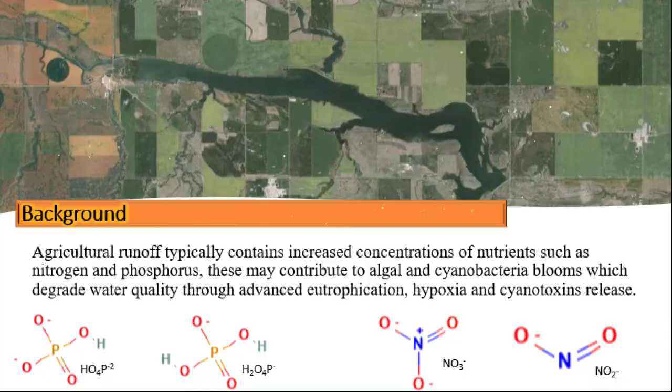A watershed that has been negatively affected by nutrient contributions includes the Gulf of Mexico Dead Zone, which is an area of hypoxic waters at the mouth of the Mississippi River. Its area varies in size, but it can cover up to 6,000 to 7,000 square miles. It occurs between the inner and mid-continental shelf in the northern Gulf of Mexico, beginning at the Mississippi River Delta and extending westward into the upper Texas coast.

It's the largest dead zone ever recorded, and I know you're all asking, how does this relate to me? I'm a farmer, or I live in the city in southern Alberta. Why is this relevant? Oh, please stay tuned.

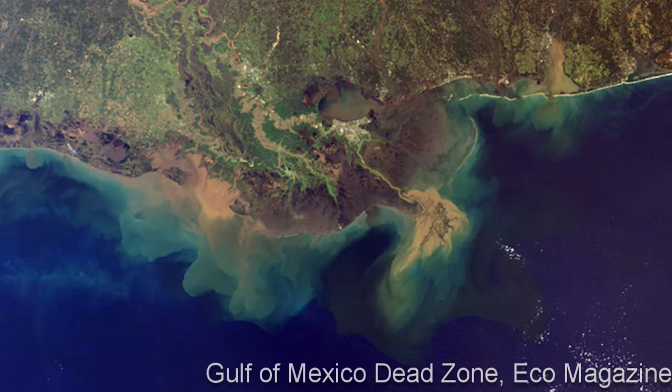Getting closer to Canada, Lake Erie is another example of a watershed that has been negatively affected by nutrient contributions. In Lake Erie, in 2014, toxic algal blooms resulted in fouled water that hundreds of thousands of people rely on for drinking, cooking, and bathing, forcing hundreds of thousands of people to rely on bottled water.

Blue-green algae, or cyanobacteria, choke up huge portions of the lake and have re-emerged as an annual summertime problem after nearly disappearing for more than a decade. And although the size of the bloom varies from year to year, in 2014, the bloom was nothing compared to the 2011 record breaker that took over a whopping 5,000 square kilometers of the lake. There is clearly a trend towards larger blooms.

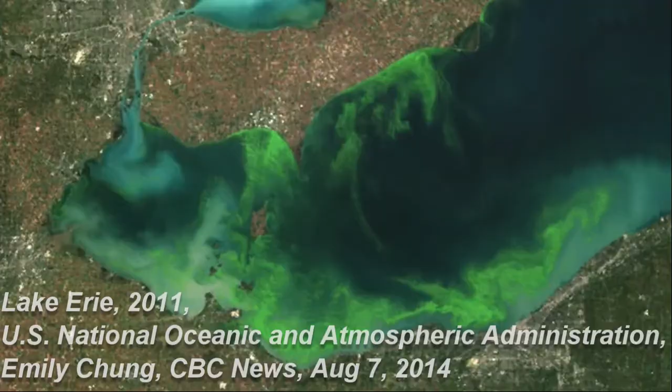And I know what you're thinking. Sure, that's in Canada, but that's a long ways from my farm or community in southern Alberta. How is that relevant to me?

And this is but one example of many within Alberta, as many of the reservoirs in southern Alberta are eutrophic systems. These are rich in dissolved nutrients that stimulate the growth of aquatic plant life. And decomposition of that plant life results in the depletion of dissolved oxygen, resulting in hypoxia. Some of the reservoirs can at warmer times of the year experience blooms of blue-green algae, also known as cyanobacteria.

The cyanobacteria is a naturally occurring bacterium that is found within many water bodies throughout the world. During periods of increased temperatures, large populations can develop, which release a toxin, a cyanotoxin, microcystin, that can result in death by respiratory system failure or liver cirrhosis and failure. While this bloom dissipated days later, it is important that if you notice blooms of this bacteria within water bodies and water sources such as springs and water troughs, that you prevent animals and livestock from entering or consuming the water and clean out that water source.

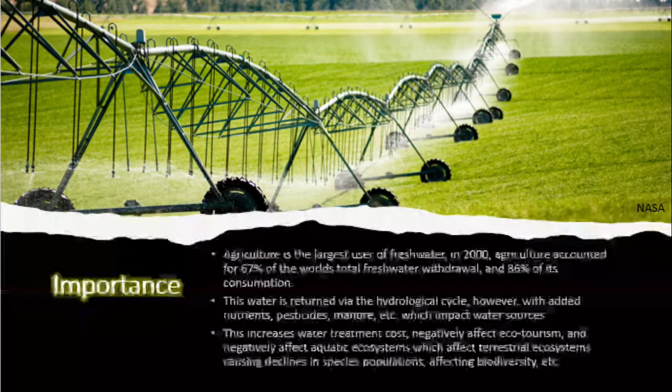It comes as no surprise that agriculture depends on fresh water. It's the largest use of fresh water in the world. In 2000, agriculture accounted for 67% of the world's total freshwater withdrawal and 86% of its consumption.

This water is of course returned via the hydrological cycle, however, with added nutrients, pesticides, manure, and other pollutants, which impact water sources. This increases water treatment cost, negatively affects ecotourism and negatively affects the aquatic ecosystems, which affect terrestrial ecosystems as well, resulting in declines in species populations, affecting biodiversity, and many other effects.

There's many different beneficial management practices that can be implemented to control nutrient contributions to downstream watersheds. These include conservation tillage, crop nutrient management, pest management, conservation buffers, irrigation management, grazing management, animal feeding operations management, and erosion and sediment controls.

I know what you're thinking. I'm just a farmer or a rancher, or I own a golf course in Alberta. I don't have a lot of money to invest in new technology. And why should I spend a bunch of money to solve problems thousands of kilometers away from me? What can I do on a farm level to mitigate problems closer to me?

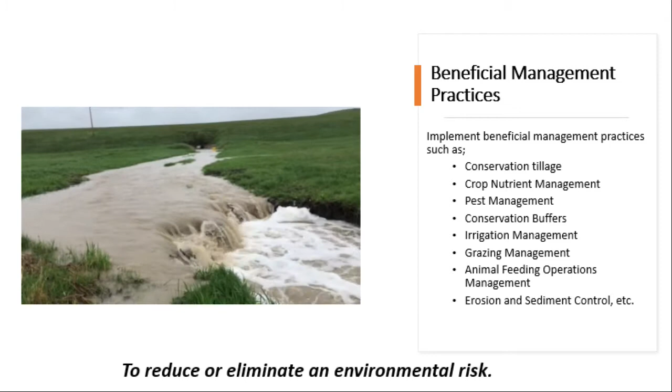Throughout this presentation today, I'll be discussing the phosphorus filter, which fits loosely into the animal feeding operations management and erosion and sediment control areas. Phosphorus is an essential nutrient for plant and animal growth because it's a key element in many physiological and biochemical processes. Alberta soils are generally low in phosphorus for optimum crop production, less than 60 parts per million crop available phosphorus in the top 15 centimeters of that soil profile.

Successful crop production often requires the addition of phosphorus in the form of chemical fertilizer or manure to the soil. Phosphorus is also added to livestock diets to ensure optimal growth, and much of that ingested phosphorus is excreted in the urine and feces. As part of the natural and essential nutrient cycling, phosphorus adheres tightly to the soil profile, so it is commonly transported by erosion from the landscape. Runoff from agricultural systems and from land development, pollution from septic systems and sewers, manure and sewage sludge spreading, as well as other human-related activities may increase the movement of phosphorus containing inorganic and organic substances into aquatic systems.

Phosphorus occurs in many chemical forms in soil and water. However, it is generally not very mobile in the soil, unlike some nutrients such as nitrogen. Also, phosphorus does not have a gaseous form that cycles through the atmosphere, like other essential nutrients. Phosphorus is readily absorbed by soil particles and generally does not leach through the soil profile unless soil phosphorus levels are excessive, and then it can migrate downward with water movement. Generally, overapplied phosphorus tends to accumulate and stay near the soil surface, and this can increase the risk of phosphorus loss through soil erosion and surface runoff.

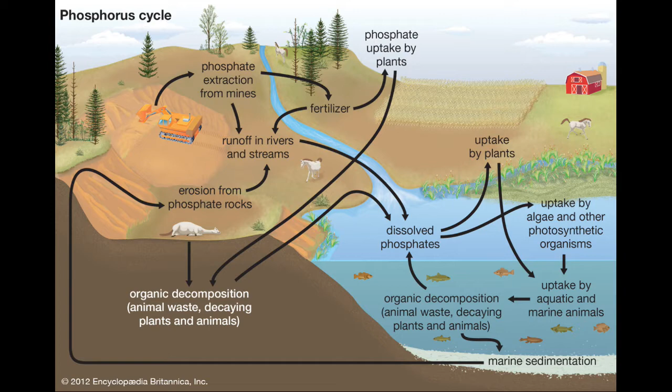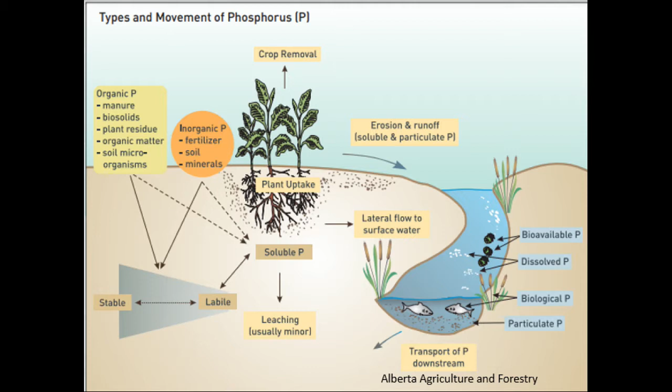In soil, not all phosphorus is the same. It can be either organic or inorganic molecules. In addition, the molecules that contain phosphorus will change in the soil through nutrient cycling. Phosphorus inputs into the soil for agricultural purposes are primarily from the application of chemical fertilizer and organic sources, such as manure. Soil phosphorus is categorized into three types: soluble phosphorus, labile phosphorus, and stable phosphorus. Throughout the presentation today, I'll be discussing the soluble phosphorus phase. Soluble phosphorus is a very small part of the total soil phosphorus, but it's the fraction taken up by plants. It can enter surface water bodies, is biologically available, and can rapidly stimulate aquatic growth.

Phosphorus moves from the landscape attached to soil particles carried by wind or water, and in dissolved forms carried by surface water runoff. Particulate phosphorus refers to all forms of phosphorus absorbed by soil particles and organic matter. Dissolved phosphorus, or DP, refers to the form of phosphorus dissolved in the surface runoff. Once mobile, phosphorus can be redeposited elsewhere on the landscape or be carried to surface water, potentially degrading water quality.

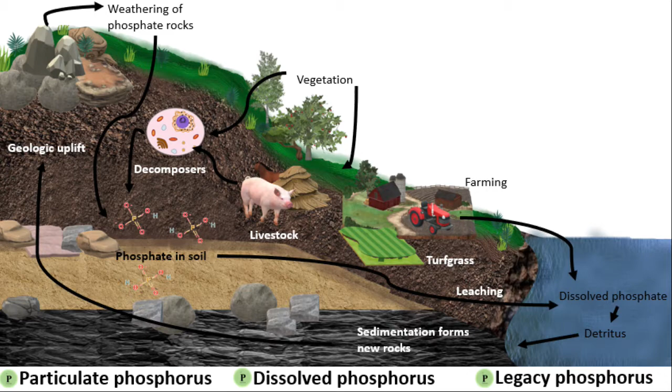Surface water runoff can transport nutrients such as phosphorus and nitrogen from livestock manure and fertilized agricultural fields into freshwater bodies. Oklahoma State University researchers have been developing phosphorus filters to effectively remove dissolved phosphorus from surface water runoff. In Alberta, most of the phosphorus is in the dissolved form, which is readily available to algae and aquatic plants, which can result in algal blooms and excessive plant growth, which both cause deterioration of water quality.

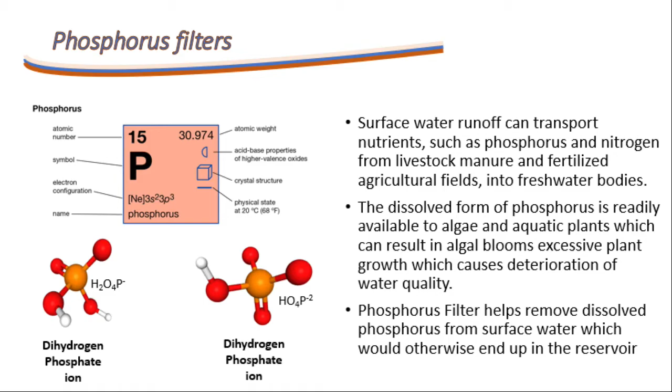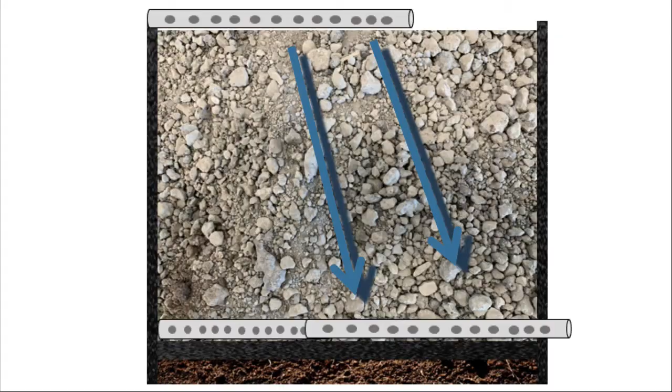The phosphorus filters are designed to use industrial byproducts such as fly ash, steel slag, red shale, and other materials such as biomass. These can be used as a filter media to capture and hold the dissolved phosphorus, thus preventing it from moving into the water body. Within the filter structure, the runoff wastewater is introduced to the filter media through perforated PVC pipes. The water flows down through the media, and the PSM binds the dissolved phosphorus, thus reducing the concentration in the water. The water flows out of the perforated PVC pipe and out of the filter system. It is important to have the filter system drain into an area that is resistant to soil erosion, such as a vegetated buffer.

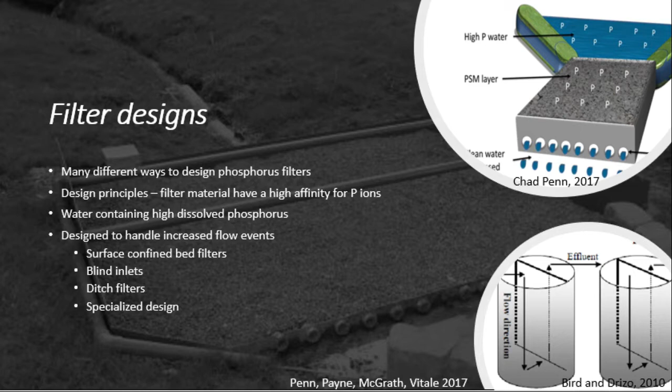There are many different filter structures that are generally specialized to meet the project objectives and site conditions. The filters are built to match the filter media that is used. And the filter must also be constructed to meet the runoff velocity and volumes for an increased precipitation event.

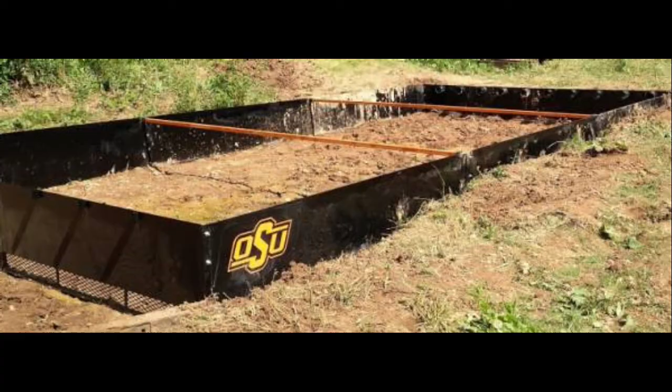Some of the possible filter structures include surface confined bed filters, blind inlets, ditch filters, and specialized designs such as tile drainage filter boxes, submerged cages, and membranous filter systems.

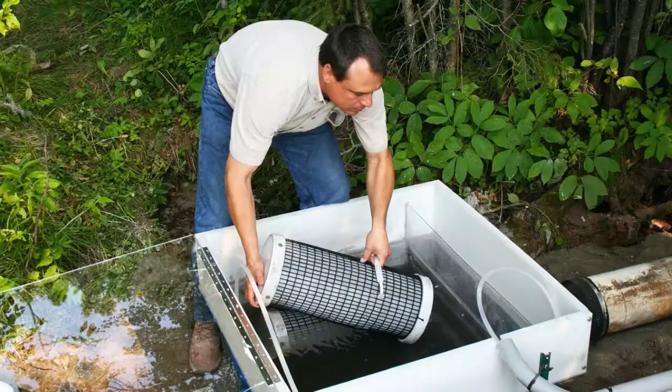In 2017, Alberta Agriculture and Forestry staff, in partnership with the County of Warner, are verifying the effectiveness of the phosphorus filter technology in Alberta through the installation of a phosphorus filter in a known nutrient-rich runoff environment. The primary purpose of this is to determine if the phosphorus filter is effective under Alberta's environmental conditions.

This site will become a demonstration site for producers and producer groups in the future to determine if the phosphorus filter technology is a cost-effective management option that can mitigate phosphorus loss and be a beneficial management practice option for landscape and production systems in Alberta.

Water sampling to date indicates phosphorus removal is approximately 95%, and the phosphorus filter is still being monitored for its filter effectiveness. It's the first filter in Canada. It's located on Tributary 4, just north of Highway 506, and it is a $70,000 project.

Project partners include the County of Warner, the OK Colony, Oklahoma State University, and of course, as mentioned, Alberta Agriculture, Environmental Stewardship Division, and Irrigation and Farm Water Division.

This project includes evaluating the effectiveness of phosphorus filter technology in Alberta and includes testing it out on a large watershed and water volumes. The purpose of this is to determine if filter material will freeze and perform in freeze-thaw effects. Water samples have continued to be taken. However, the project has since been decommissioned.

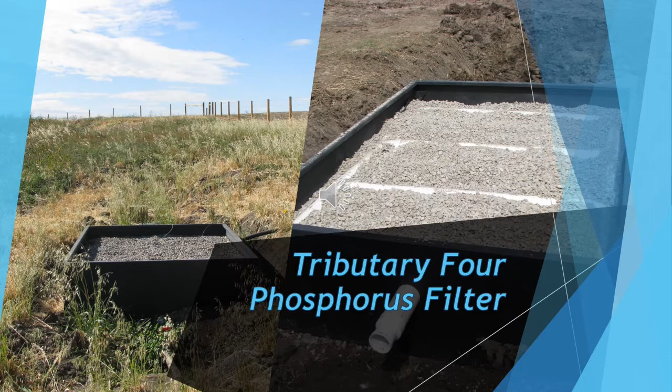This is the Tributary 4 phosphorus filter after it was installed. As you can see within the filter structure, there is a gray material. This is a gravel layer that is overlying the biomass filter material shown earlier in the presentation. The biomass material is a more expensive filter material made in Southern California. As mentioned, there's many other filter materials that can be used, such as fly ash, steel slag, and red shale.

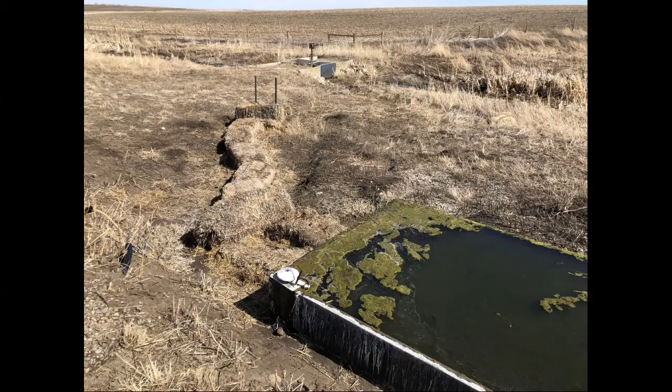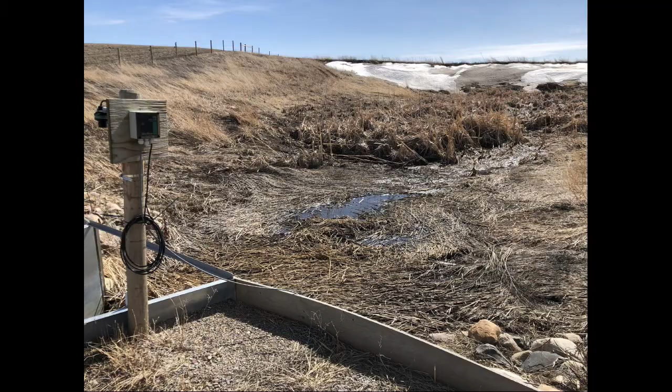The instrumentation shed, as shown, includes a weather station and ISCO water samplers that were used to collect water samples from the filter structure. The flume was used to measure the water flow from the reservoir, and the project area was fenced, and an off-site watering station was installed to provide water to livestock that are fenced in the parcel following harvest.

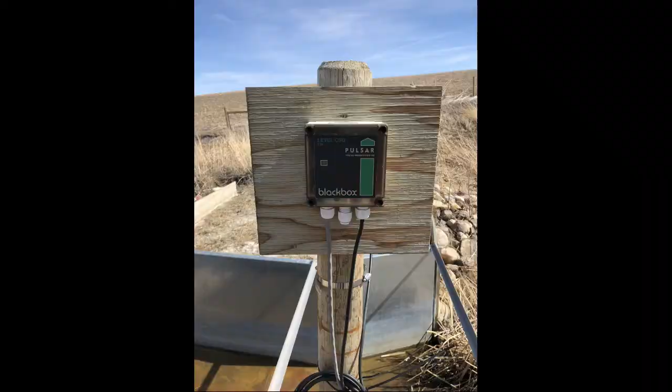The lessons learned at the OK Colony Tributary 4 phosphorus filter were implemented at a second site in 2020. The purpose of this site is primarily to mitigate agricultural runoff contributions to downstream irrigation infrastructure. The agricultural runoff can contribute nutrients and fecal coliforms that degrade water quality downstream. These nutrients can also contribute to cyanobacteria blooms and excessive algal growths.

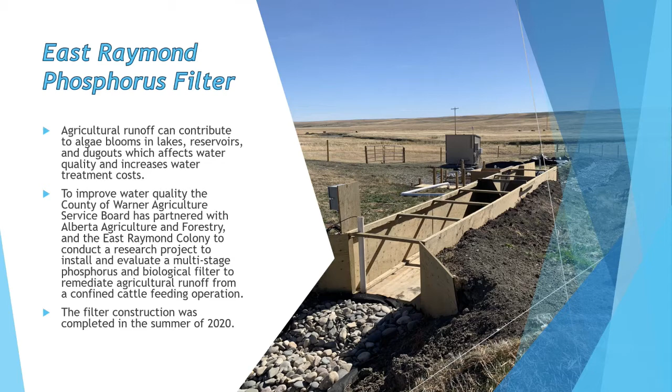To improve water quality, the County of Warner Ag Service Board partnered with Alberta Agriculture and Forestry and the East Raymond Colony to conduct a larger scale research project to install and evaluate a multi-stage phosphorus filter and bioreactor to remediate agricultural runoff from a confined cattle feeding operation.

The goal of this project is to reduce the nutrient contributions to surface water in order to improve water quality. Improving water quality within the County of Warner can decrease costs in water treatment and improve water availability to livestock, agricultural projects, and to our communities. The lessons learned in this project can be applied to other agricultural businesses, communities, and recreational facilities, such as golf courses.

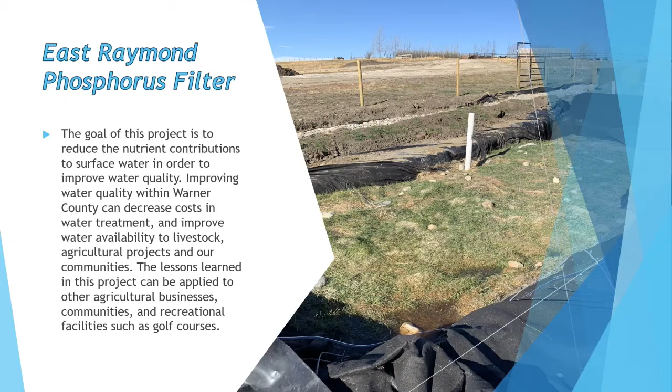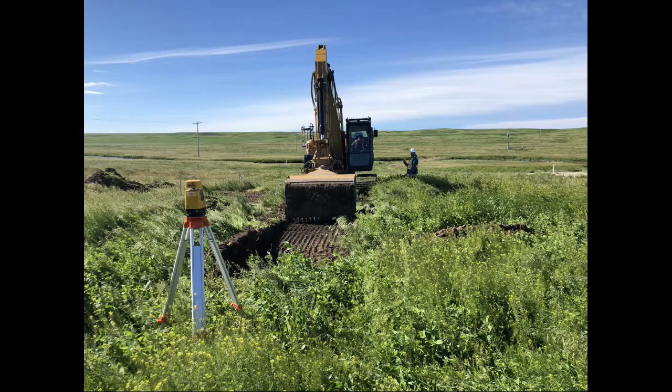In May of 2019, a drone survey was conducted of the project site by Alberta Agriculture and Forestry. This was primarily done to evaluate the changes in topography across the site and to obtain the elevations. In May of 2020, the project site was marked out with the filter site location and the location of each of the filter cells. This was conducted by Alberta Agriculture and Forestry and the County of Warner.

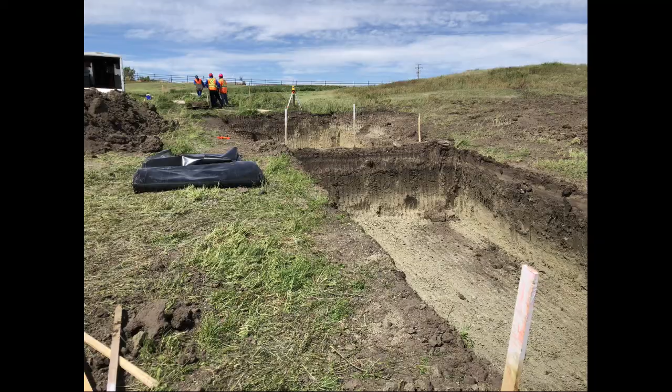On June 15th of 2020, the project construction began with the excavation of each of the filter cells, as you can see in these photographs. The phosphorus filter includes a wooden channel that diverts runoff downslope into the 3 excavations. The wooden channel was constructed to provide laminar flow into the filter structure and also to measure the water velocity flowing into the filter.

The first excavation is filled with 3 different sizes of gravel, which functions as a mechanical filter, removing the coarse organics and manure from that runoff. Water flows into a biofilter, which is a lined excavation filled with flax straw. The flax straw provides a carbon source and a home to denitrifying bacteria, which consume the nitrogen from the runoff. This bacteria will decrease the nitrogen concentration in the runoff, and as the filter fills with water, it will flow into a third excavation that is filled with metal slag.

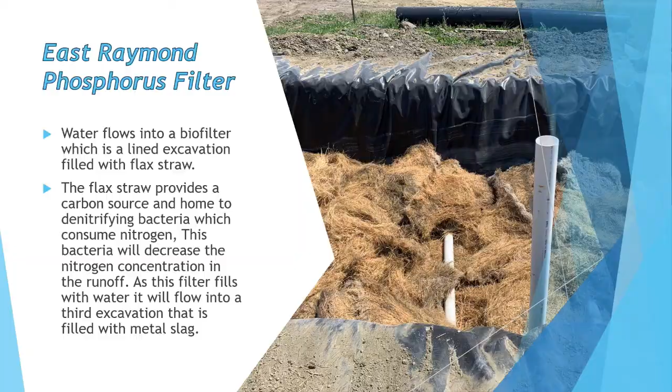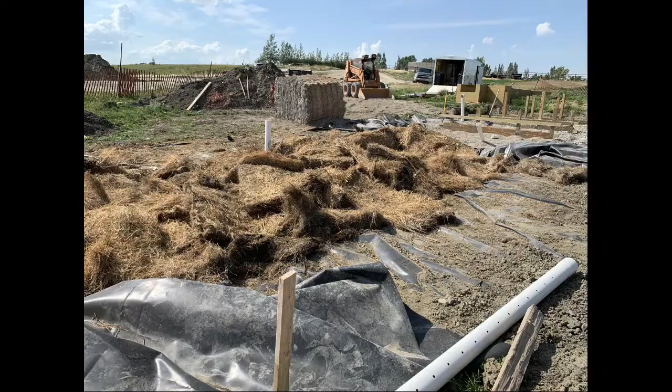The flax straw selected for the phosphorus filter was chosen because of its availability and for the physical properties of the straw. Flax is generally resistant to microbial decomposition, however does not last as long as wood chips. There's many different bioreactor materials you can select from, such as cereal straw from wheat, durum, or barley, wood chips, coconut fiber, and hemp straw. These options all vary in their physical properties. However, it makes sense to use a filter type that is local, inexpensive, and meets your project needs.

Alberta Agriculture and Forestry has done quite a bit of work in comparing the various bioreactor materials available in the province. The primary purpose of the filter material is to provide a carbon source for denitrifying heterotrophic bacteria, which use the cellular structure of the filter material as an energy source.

Once introduced into the aquatic environment, nitrogen can exist in several forms, such as dissolved nitrogen gas (N2), ammonia (NH3 and NH4+), nitrite (NO2-), nitrate (NO3-), and organic nitrogen as protein matter, or in dissolved or particulate phases.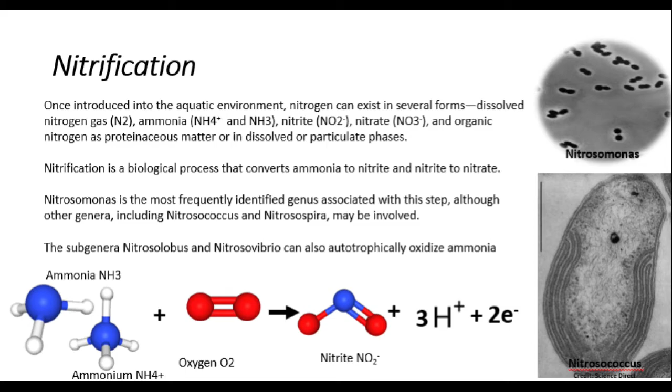Water was introduced into the filter structure bioreactor following construction. With that water, a population of bacteria, protists, and fungi were introduced. Within the filter structure, bacteria got right to work, consuming the available nutrients and using that as an energy source for growth and reproduction. Bacteria such as Nitrosomonas, Nitrosococcus, and Nitrospira began a biological process of nitrification within the filter. The process involves the conversion of ammonia to nitrite and nitrite to nitrate.

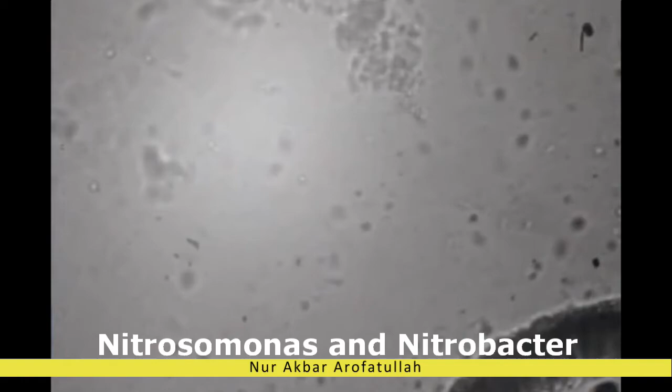In the second step of the nitrification process, nitrite-oxidizing bacteria oxidize nitrite to nitrate. Nitrobacter is the genus most frequently associated with this second step, although other genera, such as Nitrospina, Nitrococcus, and Nitrospira, can also autotrophically oxidize nitrite.

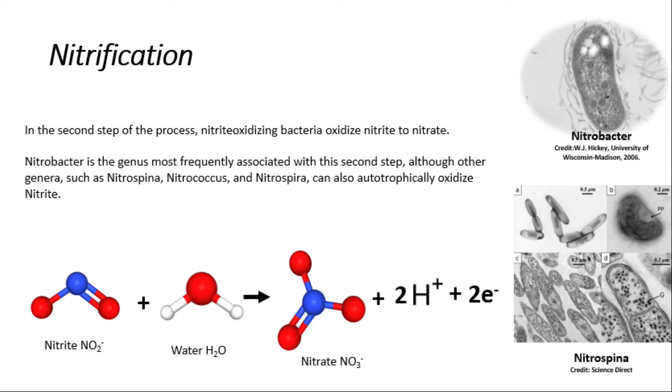Denitrification is the process by which nitrates are reduced to gaseous nitrogen by facultative anaerobes. These facultative anaerobes flourish in anoxic conditions as they use nitrate in place of oxygen as an electron acceptor when they are metabolizing carbon substrates. The biological process of denitrification involves reduction of nitrate nitrogen to nitrogen gas, but may also include nitrous oxide, N2O, or nitric oxide, NO. Gaseous nitrogen is not readily available for biological growth. Thus, denitrification converts nitrogen to a harmless form that has no significant effect on the environment.

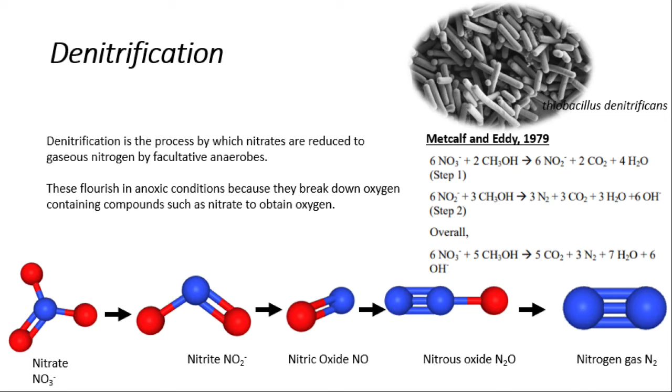The principal biochemical pathways, however, are not anaerobic, but are merely minor modifications of aerobic biochemical pathways. Denitrification is a two-step process in which the first step is the conversion of nitrate into nitrite. The second step involves nitrite through two intermediates to nitrogen gas. Denitrification is considered a heterotrophic process conducted by microorganisms that require reduced organic substrate for energy and cell synthesis.

The denitrifying heterotrophic bacteria convert the available nitrates from the agricultural runoff into free atmospheric nitrogen and use the energy from that for growth and reproduction. There are a number of different bacterial species that can perform this biological process, and a carbon source must be available for the process to occur. The flax filter material would serve that purpose.

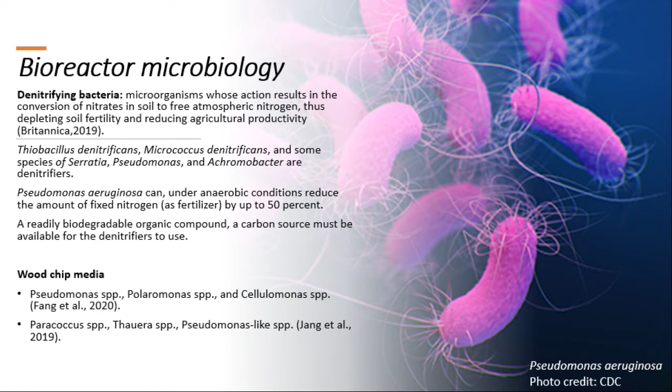Something to note is that denitrifying bacteria are generally more difficult to cultivate than nitrifying bacteria, and you have to be careful not to flush them out of the system. The third excavation is filled with metal slag, and that metal slag is about 50% calcium oxide, 40% iron oxide, and 10% silicon oxide, with trace amounts of magnesium, manganese, and sulfur. The metal slag will bind with dissolved phosphorus and decrease the phosphorus concentration in the runoff.

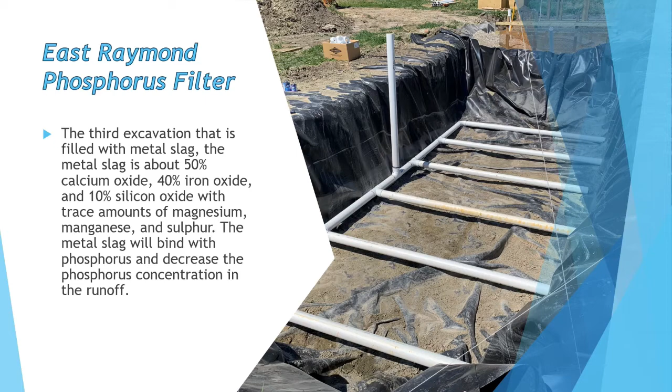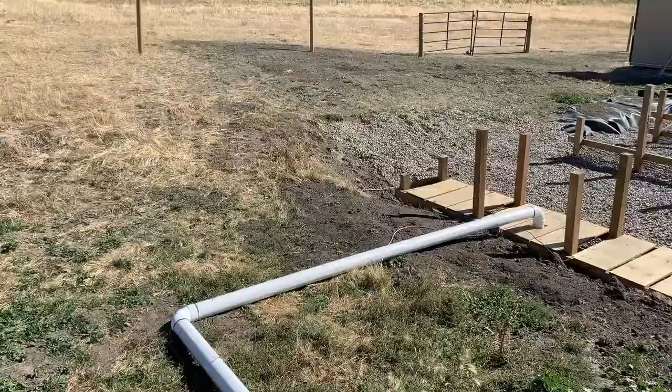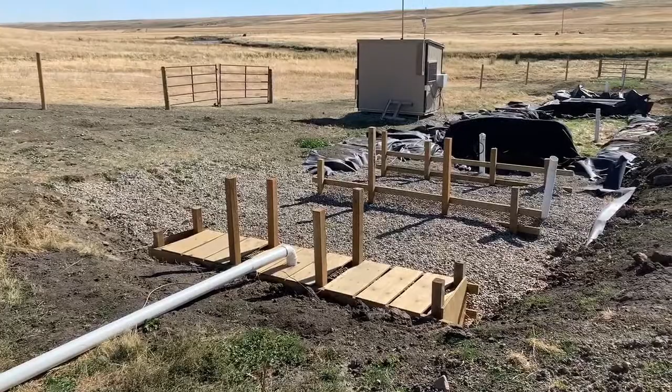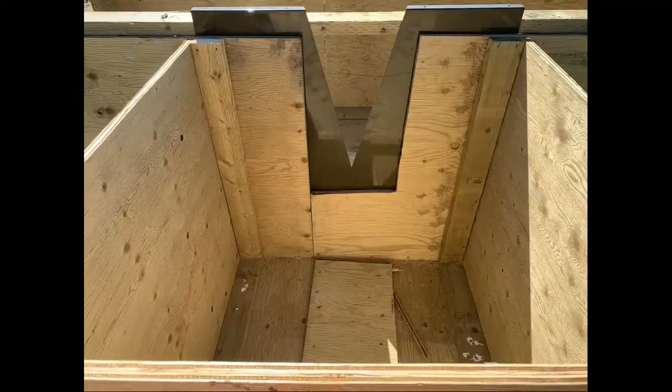This video shows a landscape shot of the project site. You can see the wooden channel and cobble overflow channel, which will be used to divert increased runoff amounts should we encounter a drastic precipitation event. The PVC pipe shown near the channel will divert water from the wooden channel into the filter. Within that channel, two weirs are present, as shown. The water flows over those weirs and into the pipe, which flows into the gravel filter.

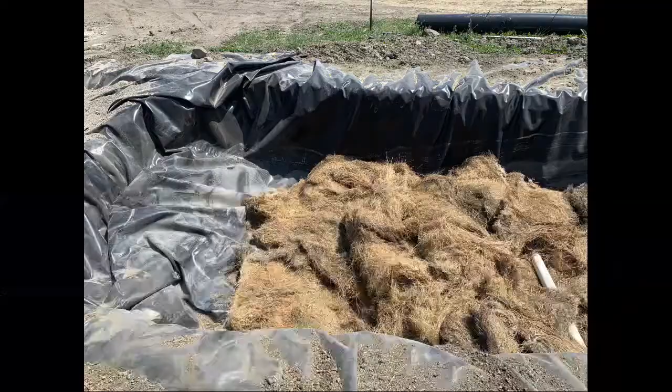Connecting the gravel filter to the bioreactor is a PVC pipe. As water fills the gravel filter, it flows into the bioreactor. The large black object shown is a flax bale covered in geotechnical fabric that is used to stabilize the boundary between the gravel and bioreactor, which was weakened during the rain events after the excavation. The bioreactor was filled with flax and covered with a geotechnical fabric and topsoil overburden to insulate the filter. As expected, there was settling of the filter material.

The bioreactor has averaged 4 degrees Celsius over the winter, even on the night of February 12th, in which the atmospheric temperature was minus 35 degrees Celsius. The flax will degrade over time and may require recharge through the addition of more flax straw. The topsoil was seeded to a grass mix and covered, as were the berms used to collect runoff, as shown.

The instrument shed houses the wiring for the flow sensors and temperature probes. It also houses 2 autosamplers. The solar panels provide current to passively recharge 2 12-volt batteries within the shed, which power the ISCO water samplers. Now you may think that the exposed wires on the site are disorganized, but in reality, if you place these within steel conduit, mice tend to chew the wires.

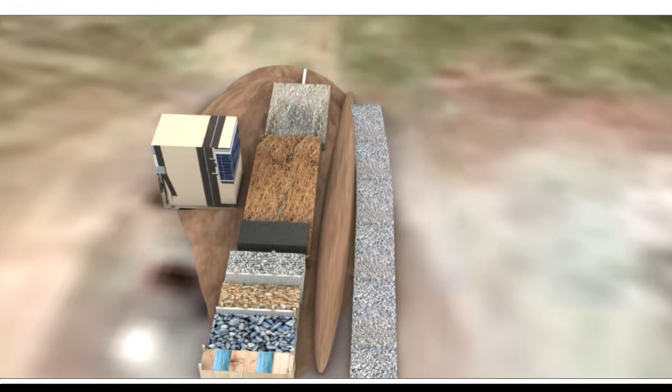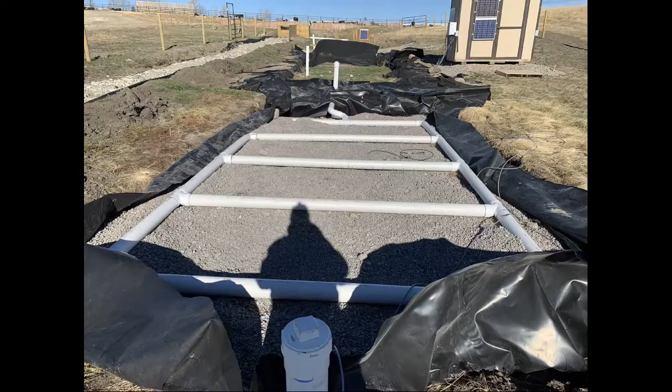The vertical PVC pipes sticking out of the filter structures provide an access point for the temperature sensors and permit the direct sampling of water from the filters. These ports will also allow the introduction of water to flush out the filter if needed. The site must be fenced to prevent cattle damage, and the phosphorus filter, which is visible, has a PVC distribution network, which allows the water which flows into the filter to be evenly applied to the slag material to increase adsorption of the dissolved phosphorus. From the phosphorus filter, the water flows downslope through a pipe and away from the filter.

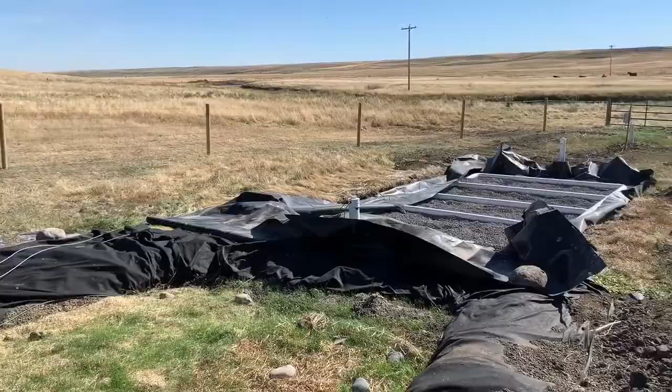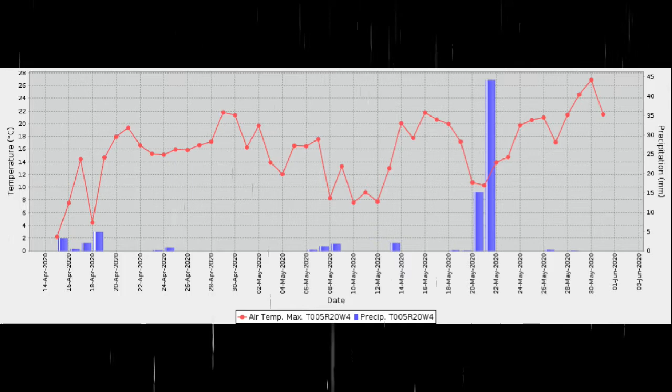This year within the county was unusually wet. In the spring and early summer, we received increased precipitation. Most notably was May 21st, in which 15 millimeters fell, followed by an additional 43 millimeters. This saturated the confined feeding pens, and there was runoff downslope through the filter project area and off-site to the east. This flashy precipitation event really demonstrated the need for a mitigation option, such as a filter at the site.

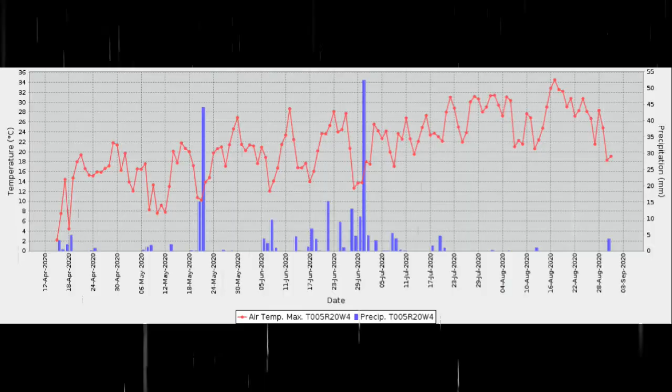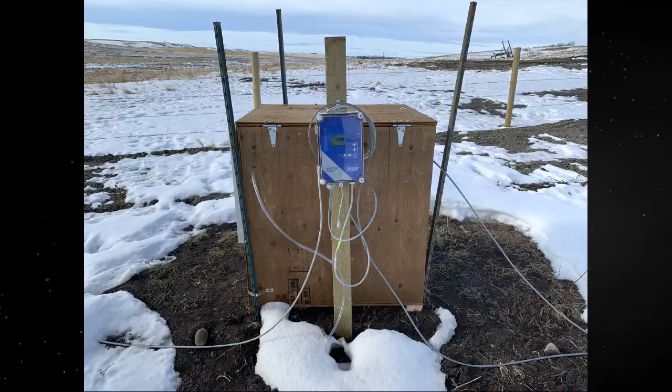Precipitation caused delays throughout the construction process, as shortly after beginning to excavate, on June 15th, consistent rains from June 16th to July 1st routinely saturated the site and caused subsidence issues with the excavations. Which brings us to the primary reason in which we installed this phosphorus filter in southern Alberta: snowfall and sub-zero temperatures. The primary reason this was installed was to evaluate its performance with the freeze-thaw cycles to see if this is a viable means of removing dissolved phosphorus from agricultural runoff in southern Alberta.

Throughout this project, I had the pleasure of working with Ken Jansen, a technological expert who worked extremely hard to make the project a success. He set up the sensors at the site to be accessible through an iPhone app called LoggerLink, as shown in the figures. Through this app, a person can access the sensors at the site to obtain a real-time measurement of the site conditions, including the temperatures of the panel, the filter cells, air temperature, relative humidity, and a water velocity measurement of the flow sensors. As well, you can obtain the status of the ISCO samplers.

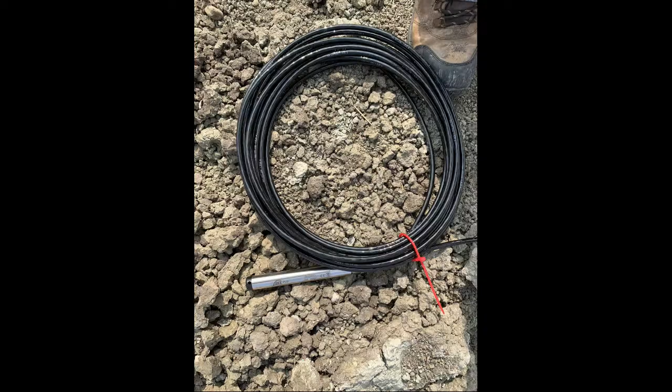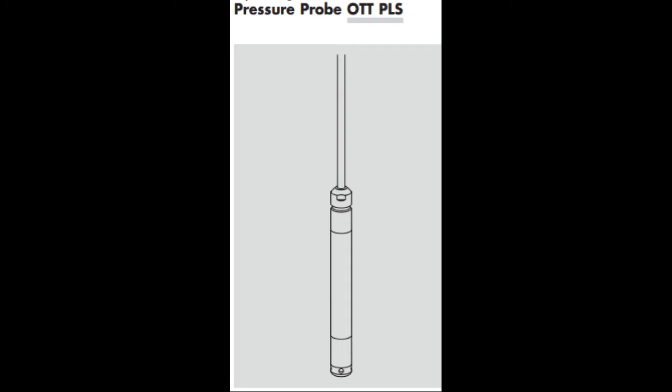The iPhone app connects to a number of temperature sensors which extend down into each of the filter cells. It also connects to a pressure probe, the OTT PLS pressure transducer. This device is used for precisely measuring the water level of ground and surface waters through use of hydrostatic pressure of the water column above a relative pressure measuring cell. A pressure compensation capillary in the pressure probe cable gives the measuring cell the current ambient air pressure as a reference. This device was mounted within the entrance of the wooden channel. This pressure transducer will detect water flowing into the channel and send a signal to the app. This is an enclosed sensor that vents through an external interface that is located in the enclosed steel box. The device is manufactured by OTT HydroMet.

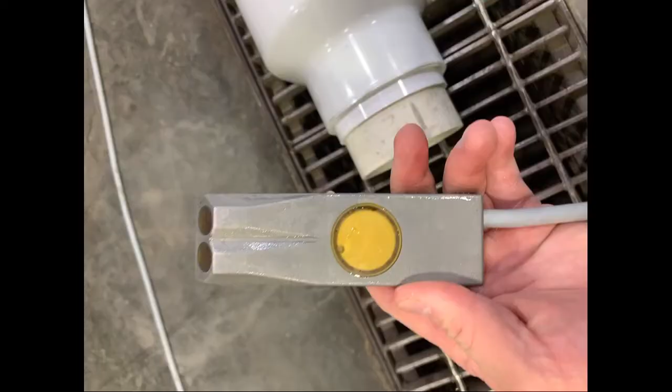The device used for measuring the flow of water out of the phosphorus filter is the Greyline Instruments Area Velocity Flow Meter Model AV-FM 5.0. The device uses a submerged ultrasonic sensor to continuously measure both velocity and level in the pipe. The sensor resists fouling and corrosion. And the flow meter can be configured with the standard submerged velocity level sensor or with the submerged velocity plus a separate non-contacting ultrasonic level sensor. The QZ02L sensor was used in our circumstance.

For the producers in the audience that are looking to implement a phosphorus management strategy, the Alberta Phosphorus Management Tool is a risk assessment tool designed to help producers make livestock and nutrient management decisions that will minimize environmental risk associated with loss of phosphorus and to maximize the benefits of manure and fertilizer nutrients. It also serves as an educational tool to explain how management practices and landscape features impact phosphorus loss, and which beneficial management practices can be used to mitigate that loss. This risk assessment tool helps farmers plan their on-farm phosphorus management. It's a Windows-based program developed by the Government of Alberta as part of the Alberta Phosphorus Watershed Project.

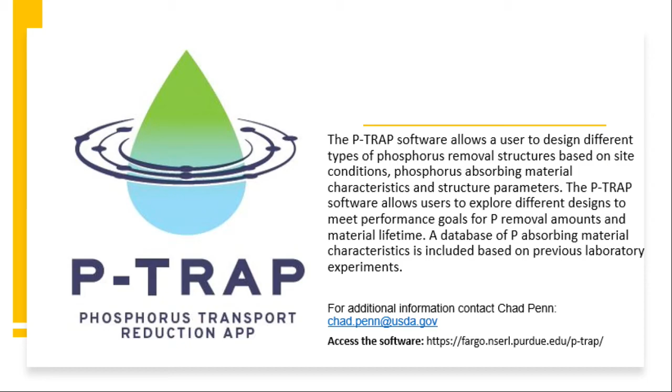I'm sure throughout this presentation you've noticed Chad Penn's name a few times. His team at the USDA has developed a P-TRAP, or Phosphorus Transport Reduction app, which allows a user to design different types of phosphorus removal structures based on site conditions, phosphorus absorbing material characteristics, and structure parameters. The P-TRAP software allows users to explore different designs to meet performance goals for P removal amounts and material lifetime. It has a database of P absorbing material characteristics based on previously completed laboratory experiments. I encourage you to check out the software. It's quite interesting.